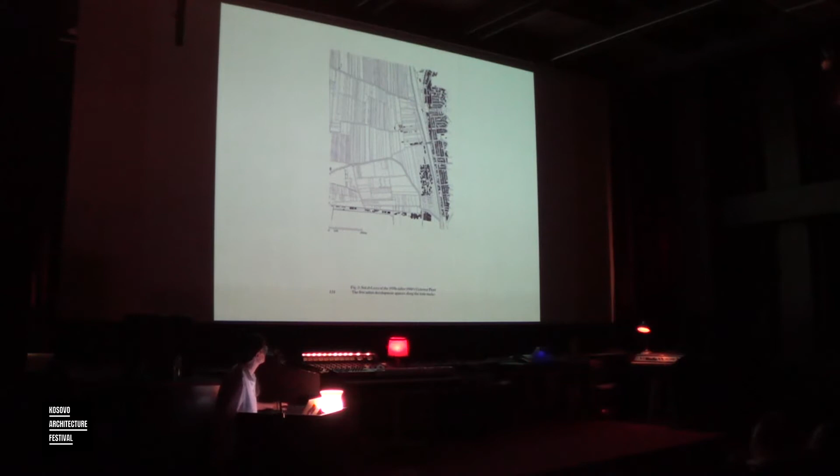So the same area in the 1970s, as you see, there's the train tracks. The right side of the train tracks is the area of Mohandesin, which I mentioned earlier, a 1950s formal settlement designed for engineers, actually, by engineers.

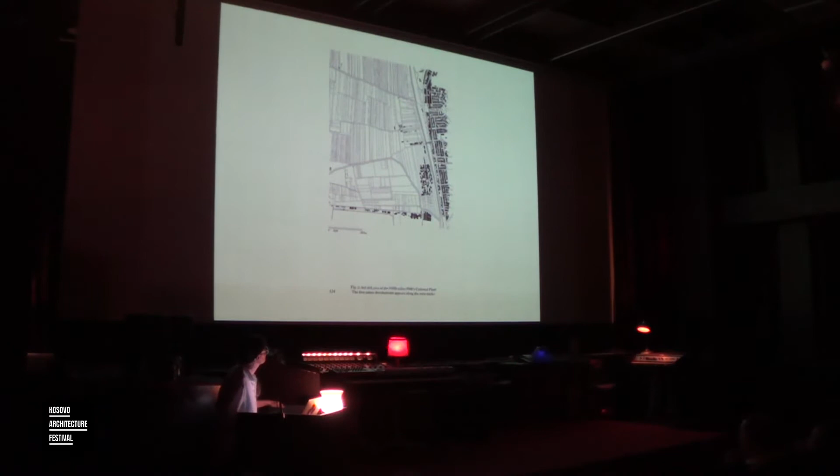And on the left side of the train tracks, you see on the lower part a sort of little settlements starting to appear. Now, this is the area today, so it's almost entirely urbanized.

These feddans are already, as you see, subdivided into small pieces called kirat, related to agrarian practices. You would lend a piece of your field to someone else, or plant it with another crop. So it's a subdivision that is already in the practice.

So the owners would sell these small pieces of their land, and some construction appears. The canals linking to these plots are filled to create the roads. The buildings multiply and start to affect the agrarian practices.

Also, land prices go up, and agriculture becomes less and less profitable because there's less water, there's shade, and there's trash. And also, as the city advances, children steal the harvest, and there's damage to the fields.

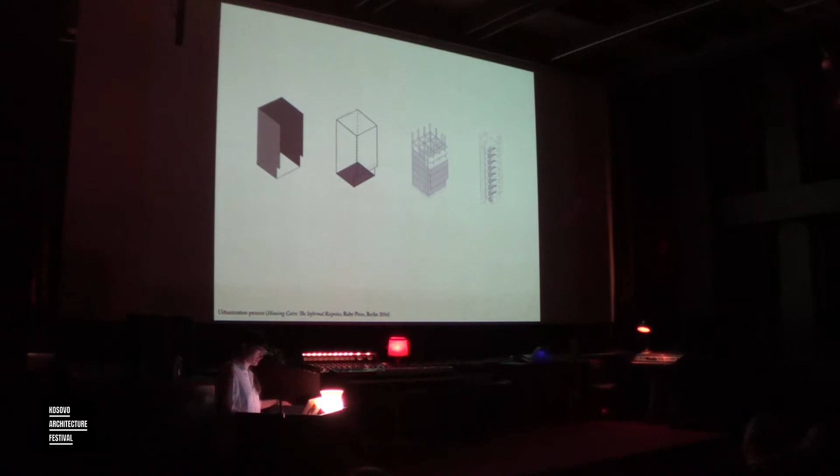There is a typical architecture generated by these processes. It's always the same, always blind on 3 facades, because you know someone will come right, left, and behind you. The occupancy of the plot is complete except for 2.5 meters left for the street, and your neighbor does the same in front, so that's how you get the street size. Then it's always a concrete structure with brick infill, something familiar to this area here, and there is usually a central staircase with ventilation shafts.

I want to show you a few architectural typologies. I will show you the smallest, type 1, the middle one, and the speculative one on the right side.

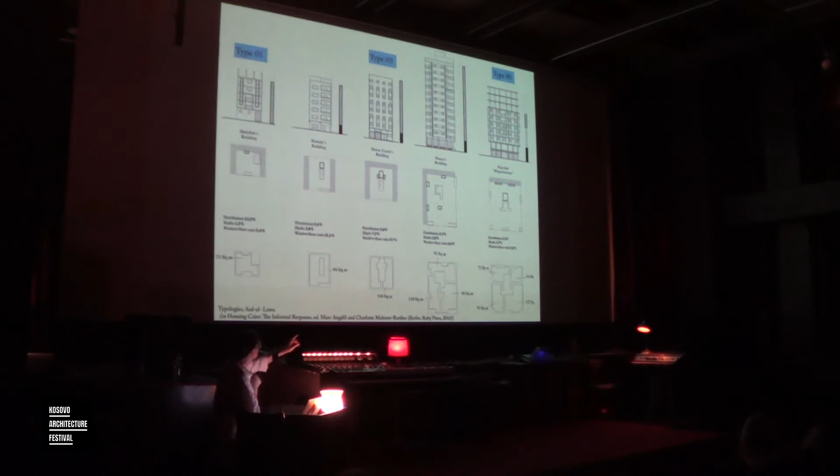This is a small one, let's say the most common type. It also grew out of need. Cairo is a city that doesn't offer any kind of formal accommodation to anyone who is not up to a certain income class. Also, people who don't have any papers or bank accounts are not entitled to anything you can find in the formal market.

People don't rent because there is also a rent control system, also based on Nasser, not for units built after 1997, but let's say the market is very unfriendly to lower income classes, who basically took matters into their own hands. People would buy a plot and save a little money, building 1 or 2 stories until they have savings, remittances from people sending money from abroad, or this collective pooling of resources called Gamaya within an extended family, where people pool money and use it once it reaches a substantial amount, or personal loans from person to person. Banks are not involved in this financing system, so it's a very incremental way of construction.

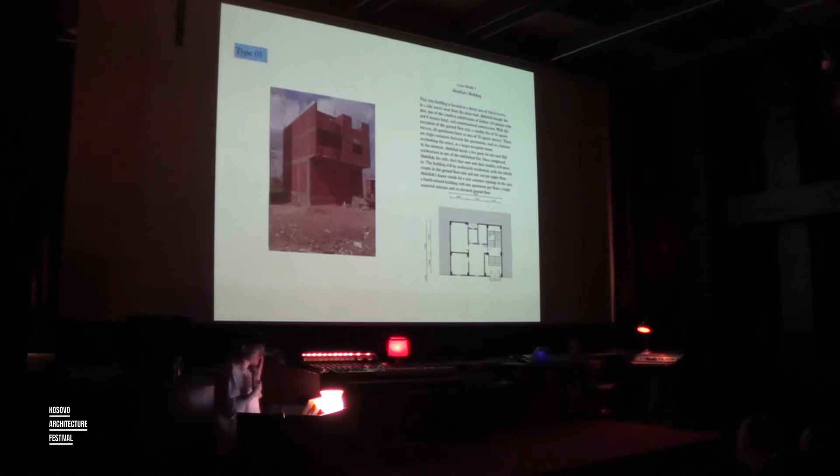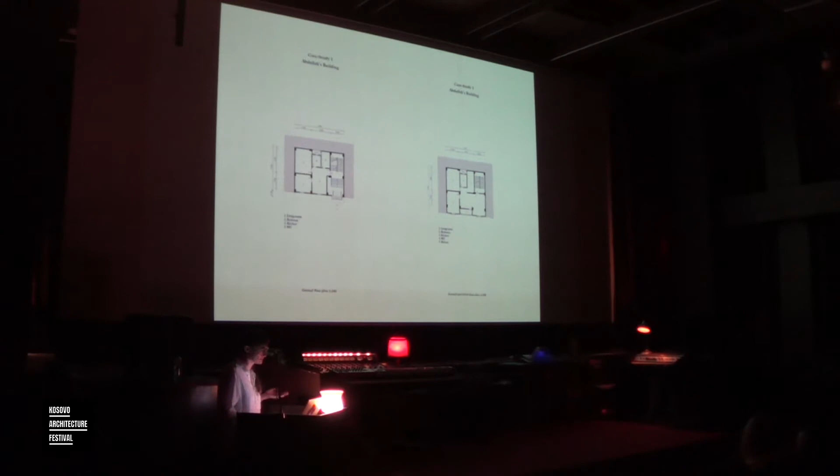When my son gets married, I can just build another story, and so on. So it's quite efficient. The floor plans are pretty straightforward: a living room, 2 bedrooms, 1 kitchen and a toilet. As you see in the back, there is this shaft and a central staircase, or in this case a single staircase laterally located. There is also a balcony on the upper floor.

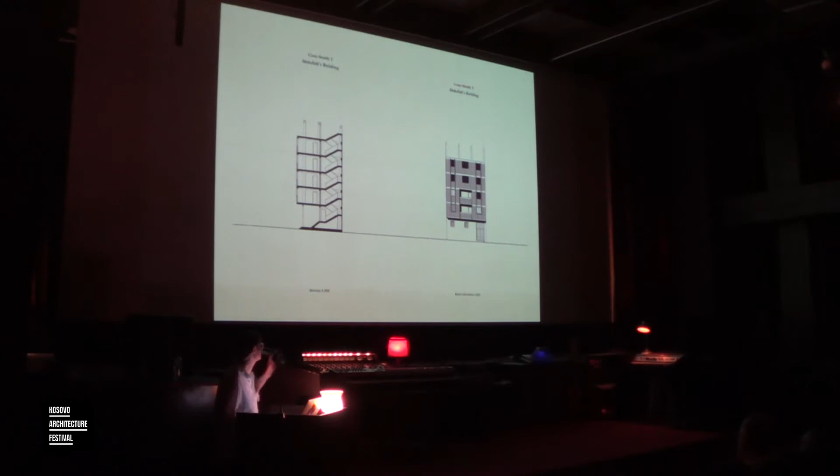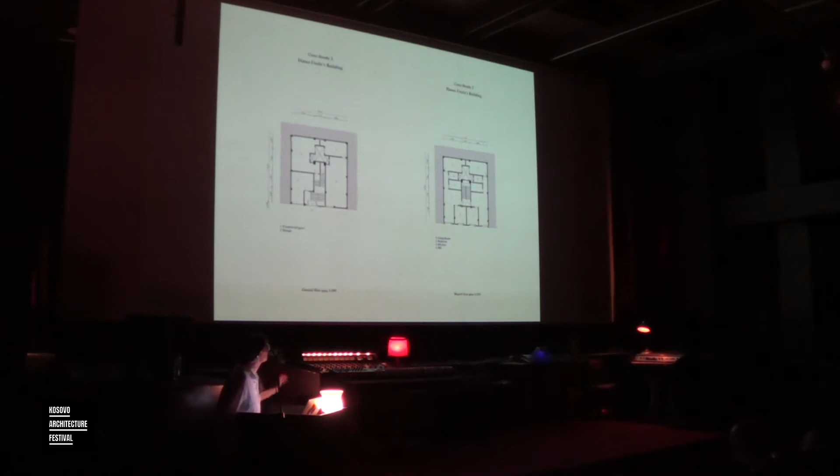It's an entire family with the cousins on the upper floor. The remote cousins get the upper floor because they are the hotter ones. So the floor plans are mirrored. You have two apartments per floor, and then it goes up. You have a bit of an ornamental treatment of the facade.

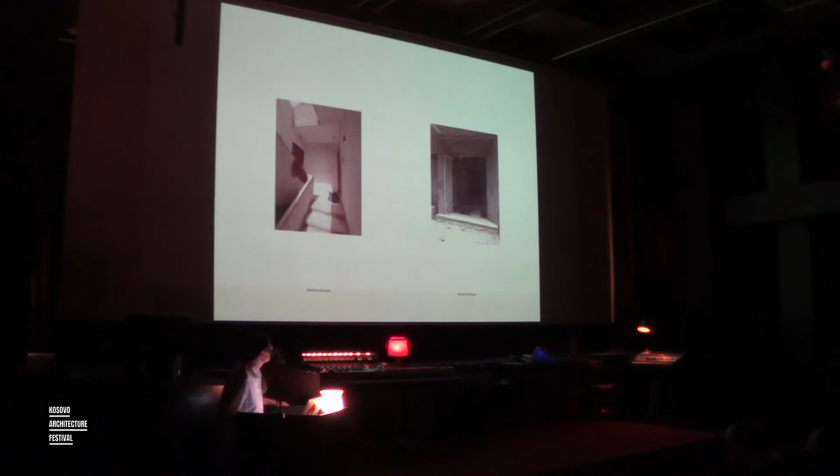This one is quite old, so after a while people might consider using a covering for the open staircase. As you see, this is the last floor and the entrance to the right. They are having workshops on the bottom.

Now this is type 5. Maybe why this one is interesting is because, as I mentioned before, this kind of architecture is very much incremental and it's also on demand. People decide they need a house, they put the money in it, they look for funding, and they supervise construction themselves. So there is a very organic relationship between the owners and the house.

And this is a speculative scenario. So it's the moment where one could argue that forces of capital have discovered this form of urbanization, and you have a kind of business partnership that created itself to construct this very big - so we're changing scale. It's a large building located on the main street. There's a partnership of 4 members. They bought the land, so we'll talk about these 4 kirats, 4 of these small field plots that I mentioned. At the time, it was about $200 per square meter, for those of you interested in prices.

So it's about 400 square meters, and each floor has 4 units, from 60 square meters to 120 square meters. It's a little difficult to see, but because it's such a big plot, it's not blind on 3 facades like the others, but has 3 facades to the left, north, and right of the building. Only the back is blind, basically. The upper shafts you see on the top are actually the blind side.

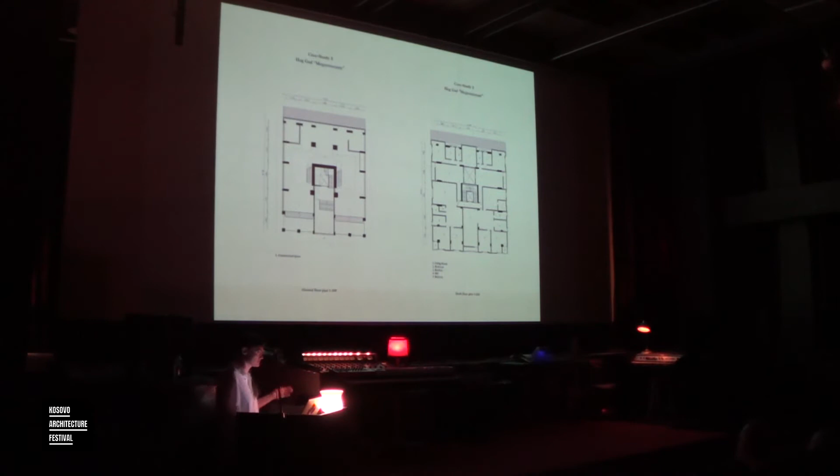So there is also a central staircase in the middle, where you see there is space for a lift, which was not installed at the time. It's a 10-story building with double height ground floor, which will host a mall, 4 commercial floors, and then 4 residential floors.

There was an engineer involved, no architects, but an engineer was involved to assess the structure, to check the plans that were produced by no one really knows who. Actually, there are plans that are circulating, informal plans, and the construction process took about a year.

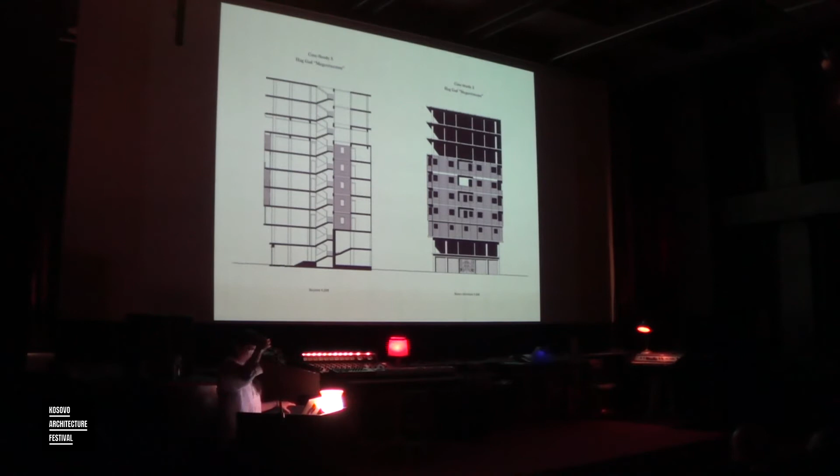And the ownership is divided by floor and then a half apartments. This is how the upper floor looks like, so it's not completed. As you see, it's very close to the neighboring buildings.

And then for the price, a buyer - so the value of the apartment starts with about $20,000 US for a 90 square meter apartment, 3 bedrooms, a reception room, a balcony, up to double the amount for larger units.

It might be important to mention that the investor, the person who actually started the project, will have to move into one of the flats because he would have to prove in that way that the structure is sound to whoever will buy. So I think that's an interesting clause.

I wonder if architects would do that. Are you sleeping? No? Because I make bad jokes about architects, I was expecting some reaction.

So what you have here is basically a speculative mode of construction with developers or groups of small investors that may build towers that can reach a total height of 15 floors. All of this in complete illegality, as I mentioned.

And maybe what is important to mention - this is quite a spectacular image that also talks about something else, which is the competition between agrarian land and urbanization, which I think might become a topic here as well. Obviously it's a lost competition for agrarian land because in the case of Egypt, which is not strictly a local case, agriculture has suffered decades of poor investments, and also neoliberal policies have basically destroyed the protective structures that were in place earlier.

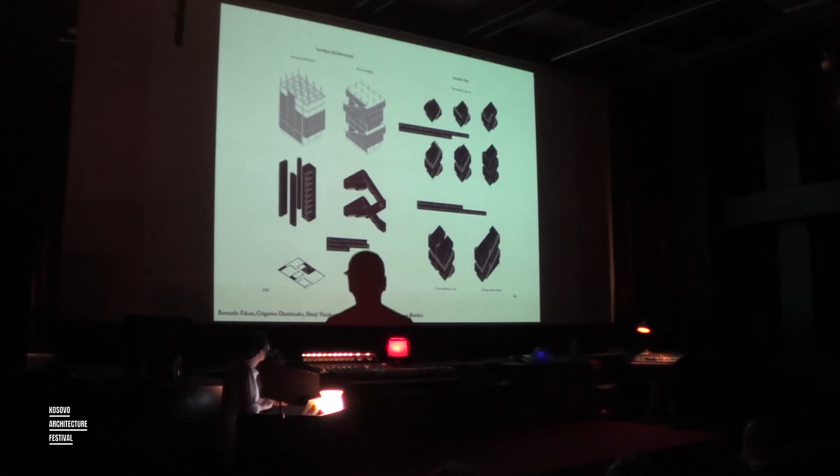This project, for instance, takes into account, as you see on the bottom left, the existing situation. It calculates all the volumes currently used in the default typology by the staircase and the ventilation shaft, and proposes a kind of circulation where the staircase is arranged longitudinally around the building.

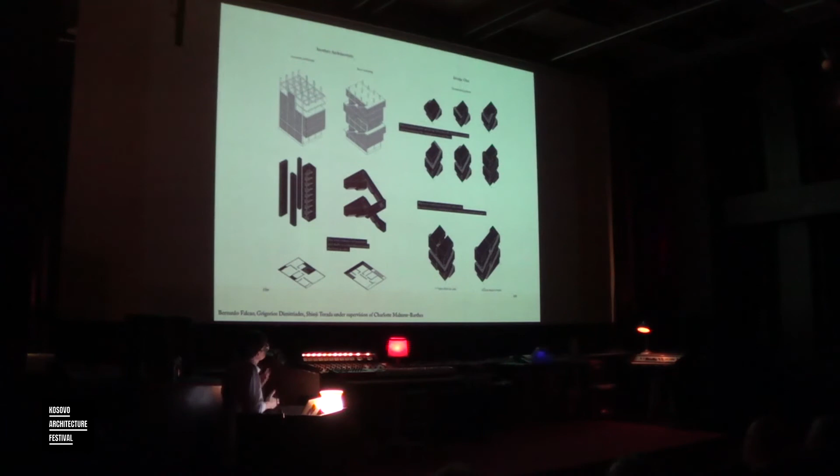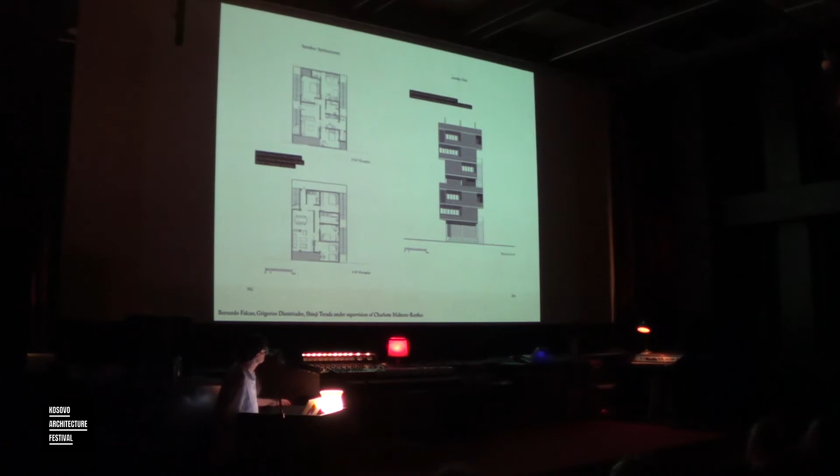Considering that this is almost a copy-paste type of urbanization, if you manage to do that as well, and copy-paste to the neighbor, front, back, right, left, you can reach a much more porous urban fabric. I'm just showing you some floor plans with a circular staircase allowing for voids to happen in something usually very compact. If you mirror them, you start to get much more ventilation into the apartment and into the streetscape, if you're able to replicate that.

Of course, when we confronted this, we proposed that. This is how, if you were able to repeat this system or replace the current typology, you would have an urbanism proposing what is currently missing, which is public space.

We proposed this to our local partners, and they were horrified. I'll let you think a little about why that would be a problem. Privacy—because a central staircase, in a lot of Muslim countries, women are veiled, and they wouldn't have to veil themselves if they're in a familiar situation with cousins on the upper or lower floor. You'd just circulate into the staircase and not have to cover up. This means you're basically on the street when you're outside. So this is also maybe something to consider.

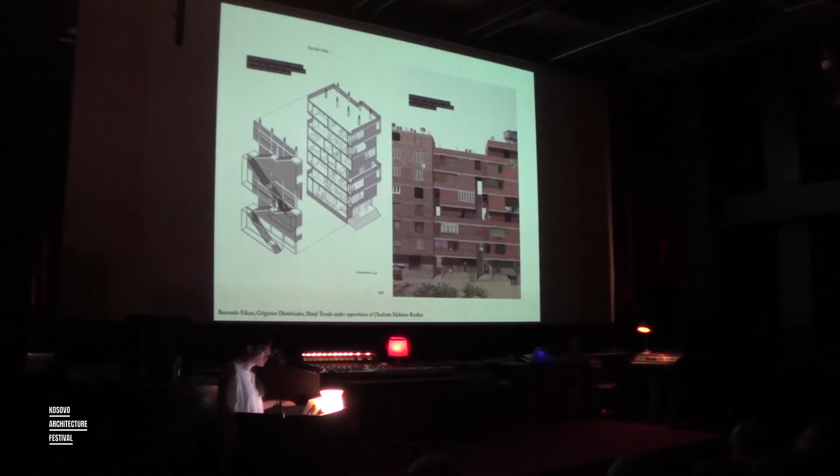We also proposed an alternative version where you could close the space with some textile, but that's not the same, in fact.

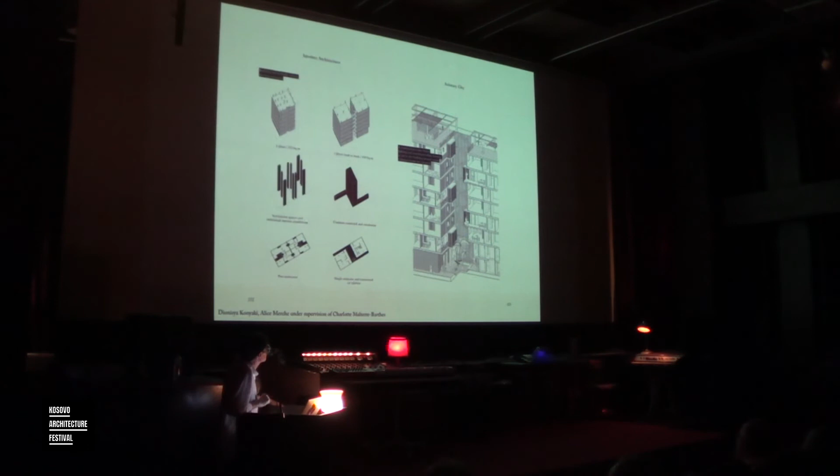This is another model proposing what's called Solidarity. It basically argues that you could get a better typology if you built two kirats together, back to back, with only one staircase, more like a central courtyard. This scheme also proposes, on the upper floor plan, a common kitchen between two apartments, assuming that in an extended family model you'd be able to do that.

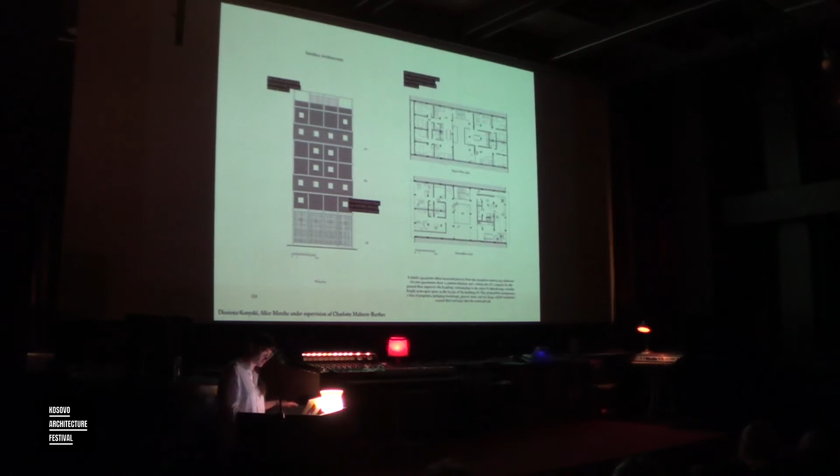Of course, people were horrified again—why would you want to share the kitchen? So it's interesting how you propose a model. This was done with students, and we confronted some of these examples, which I think are very interesting, but they also show the limits of what you can design, and how what you propose is at times problematic.

I have more examples of this work in the book that I brought, which you should find at the bookcase in the cafe. There's all the typological research in that book, as well as some of the proposed designs, and now that's what I want to conclude with.

In December we did an exhibition in the informal area—we have a very small space where an artist has a small gallery, and we invested that gallery, proposing what's called Ardella Homes, Designs by Young Architects, featuring 8 of these designs.

As you see here, it's a very small space, but it's basically takeaway floor plans. There are 2 of these examples, but a few more were also proposed. The idea is that since currently it's done based on floor plans that are circulated and replicated, one could try to influence these typologies by infiltrating design into this practice.

This was actually quite successful, so we convinced one of our partners to build one unit. He chose one that I didn't show you, but I'm going to show you a version of how it looks like.

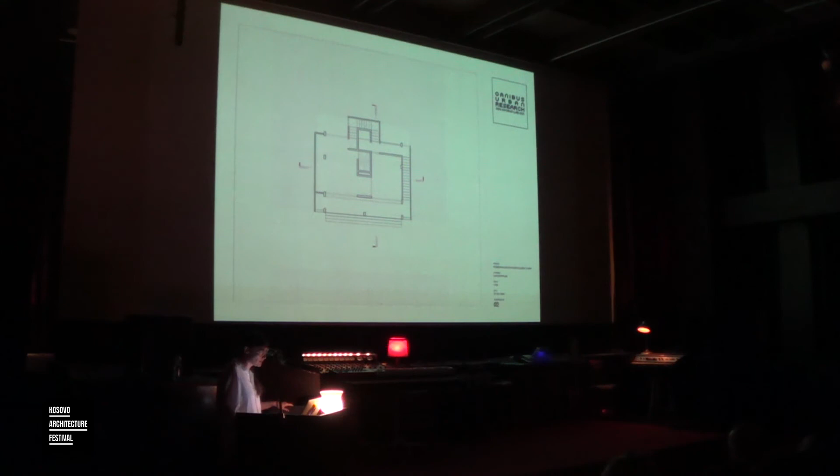So it's on this typical kirat structure with 12 by 14. We're trying to give, as you see, the bottom wall towards the street a little bit recessed inside, so we're giving a little bit more to the public space. We're also expanding the current shafts to something closer to a courtyard, at least on the ground floor. There's also a mezzanine on the first floor, so you can have double heights and a more generous ground floor situation, and a separate staircase that gives access to the upper floors.

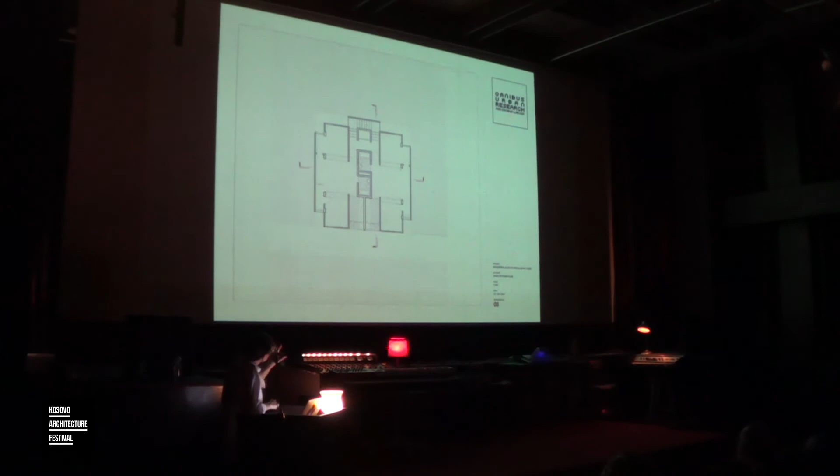Sorry, the floor plan is a bit blind, but as you see the space, it's a mirrored floor plan. You have 2 apartments by floor and a common shaft for fluids, and in the middle of this cross-shaped floor plan there is a living room which benefits from cross ventilation, but is not directly exposed to the facade.

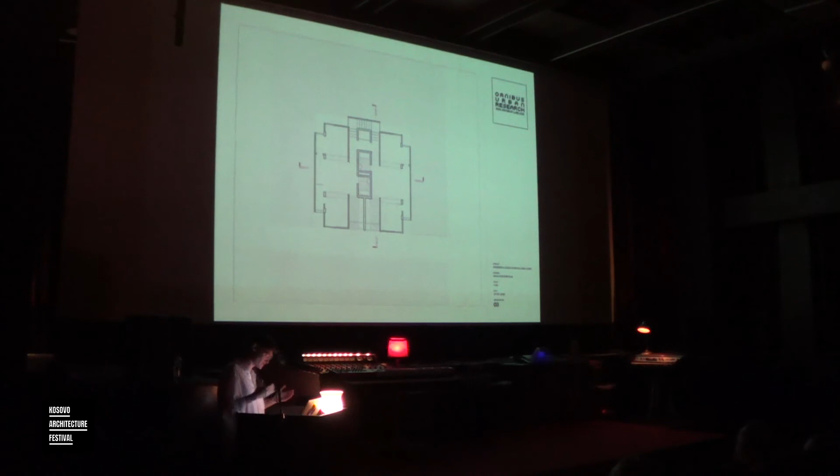This is a floor plan we developed together with our partners, and it's approved. It's not the kind of design where the actual users would say this doesn't work. Our partner validated that floor plan, and he's actually very interested in changing certain typologies. The reason is because there is also a bit of market saturation, which proves that architects come at a very late moment in urbanization.

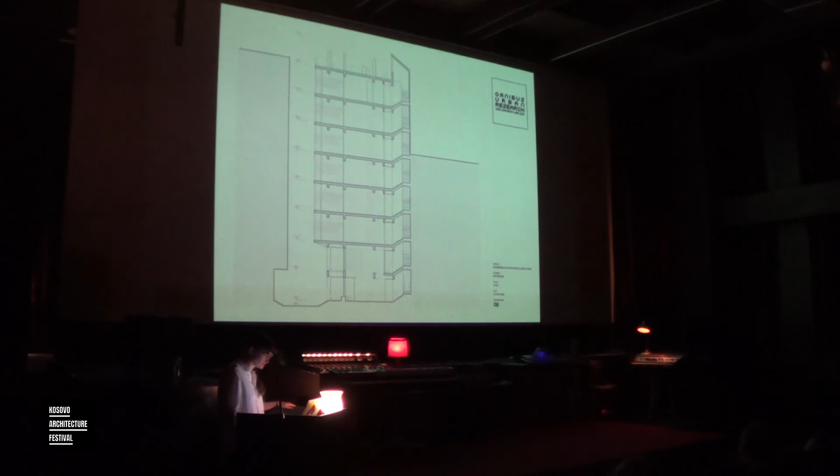What we also did, we added a badgir on the roof. For those familiar, it's a wind-catching device that allows air into the staircase. In this case, we have some small openings above the door, so you can have a kind of passive ventilation system.

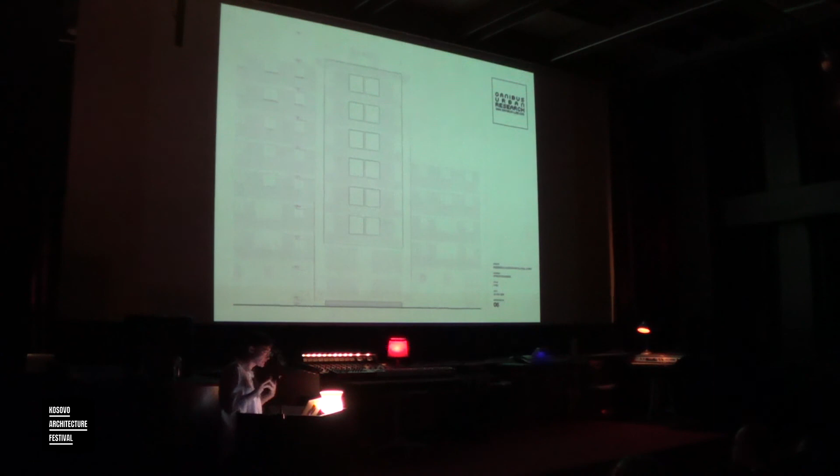The facade is not very spectacular. We're still working on it because our secret agenda is also to say that architecture can bring a kind of difference, and that it's identified as designed informal. So there is definitely a kind of paradox in that term, but we are still working on the facade. Currently it's an ornamental brick pattern.

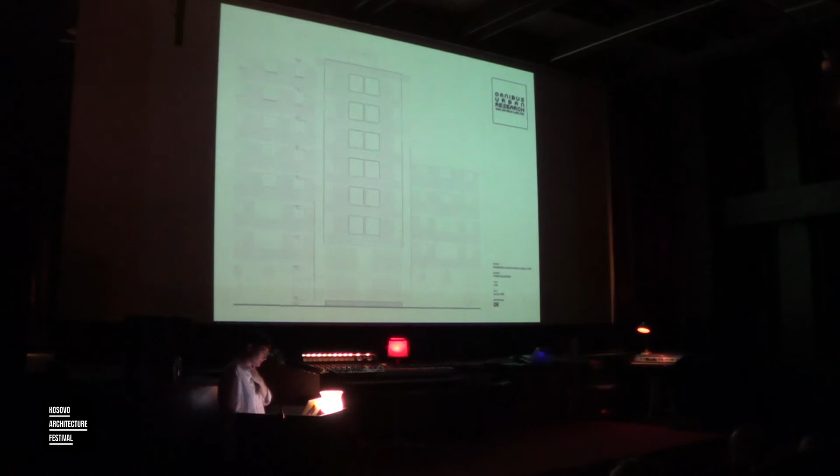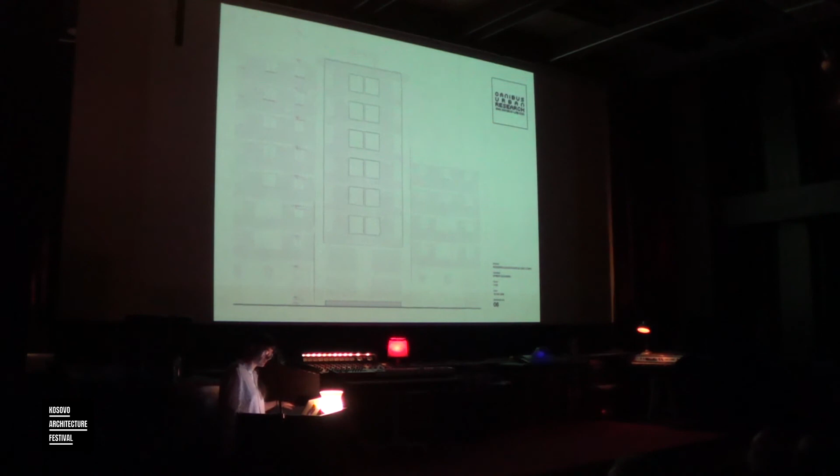We're also, of course, looking for funding, because our partner agreed to work with us if there was some kind of capital input from our part. We're saying we can do the design pro bono, but we cannot invest. So we're now in the process of looking for funding.